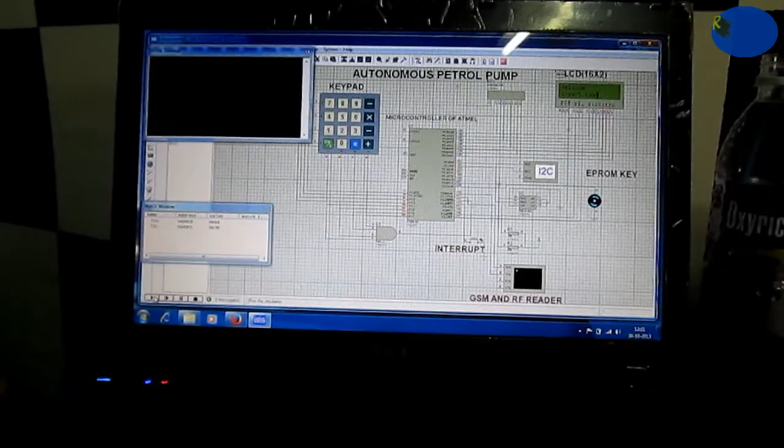So now let's see the actual simulation of our project. We can see on the LCD it will display 'Welcome' and then 'Insert Key'. Insert key means it requires the RF card, because we are giving the RF card, that is an EPROM key, to the authorized person, which contains the available balance along with his mobile number.

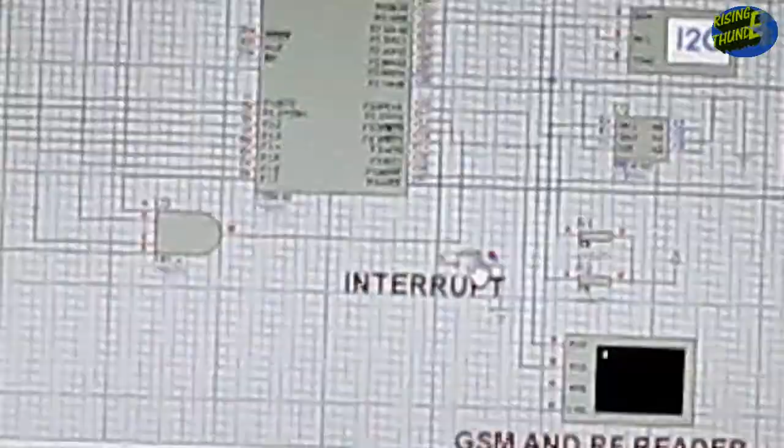Which is registered at the filling station. So I will provide the interrupt here to insert the key. Okay, so now as I press the interrupt, the key is inserted. The display is showing a wait statement because it is scanning the content of the RF card.

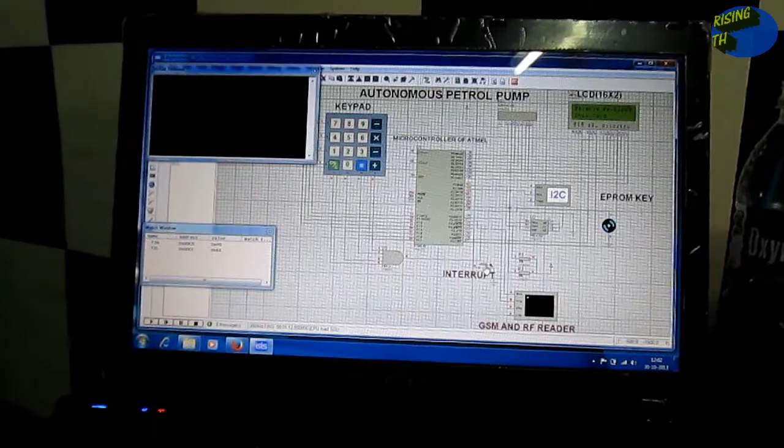That is, first the available balance in the card, and next the mobile number registered by the user. We have used this EPROM key because we are going to send a message through the GSM module to the particular customer. Now we can see on the LCD it shows balance equal to 3,000 rupees and 'show card'. This command is for showing the RF card.

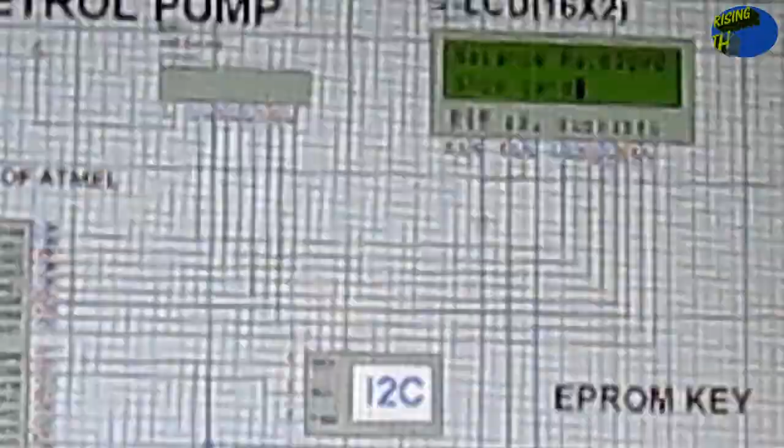The RF card, when we show it, provides a high degree of security, because it will read this 12-digit number from the RF card and provide it to the system to give access. So now we will insert the RF card number on the virtual terminal, that is, we have created the 12-digit RF number.

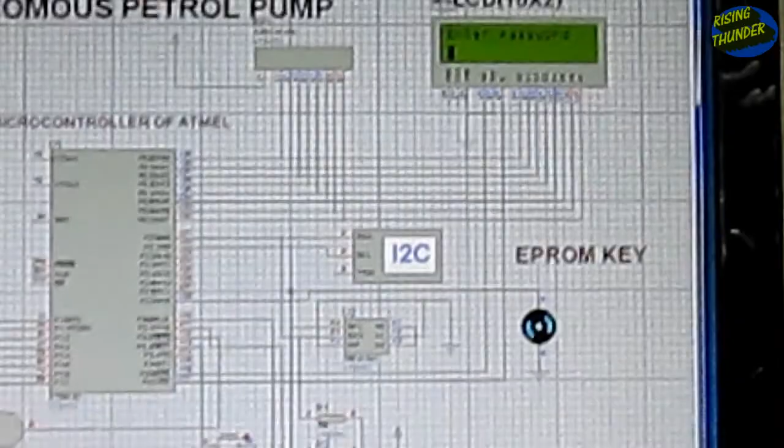Now as we insert the RF number, the display will show the valid card, and it will send the message to the particular customer's registered mobile number. The controller is now asking for the password.

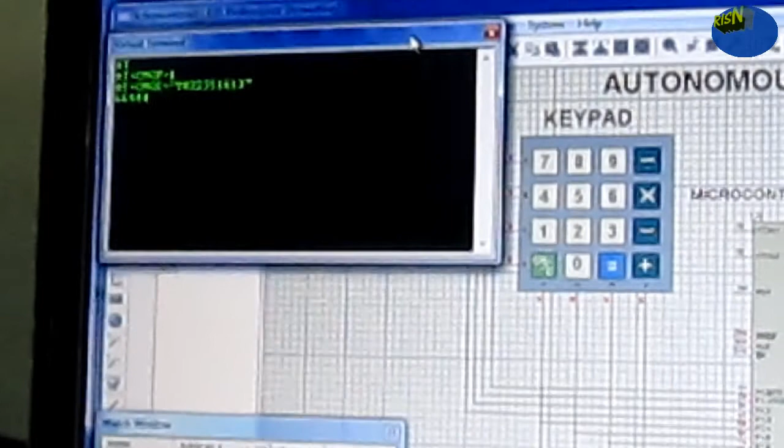The password is given on the virtual terminal. Now we can see the password, that is 66444. So now we are going to insert the password by keypad.

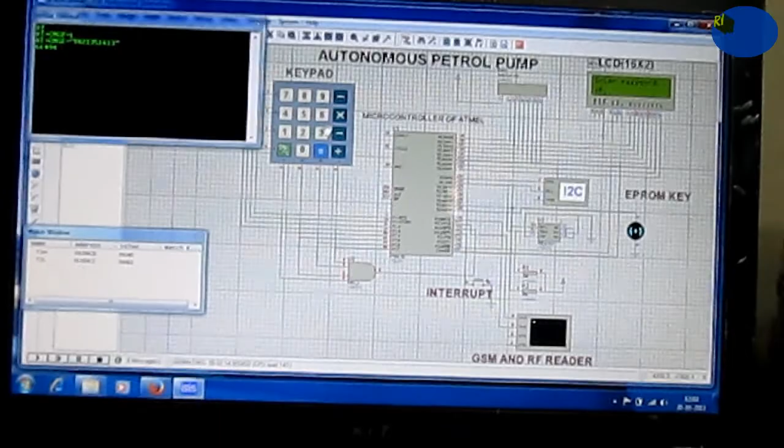6 6 4 4 4, and then enter. It will show the valid card, and now it is asking for the enter amount, that is the amount for which we require the fuel.

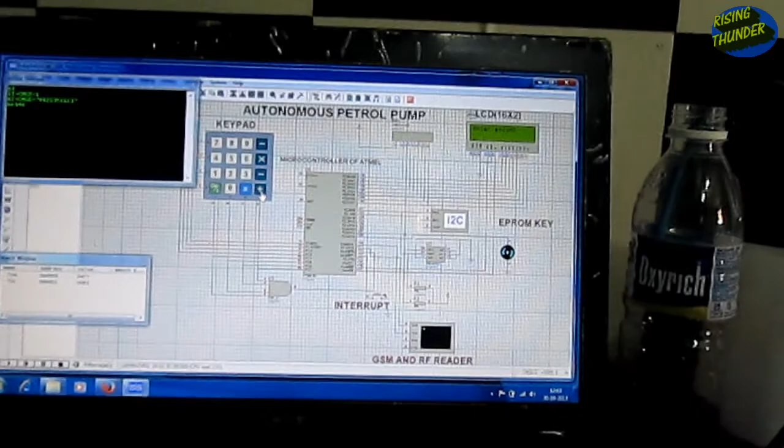So now we are going to give the amount for which we require petrol, that is 0100. Now I have written the 100 rupees petrol. So when I write the 100 and press enter...

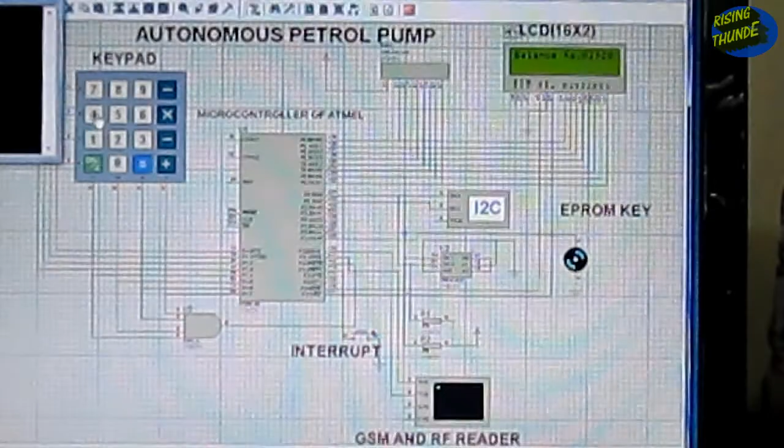...that time we can see the motor start rotating, that is the pumping motor starting to give the fuel, and we can see on the LCD that the balance is 2900, because initially we had selected 3000, which is deducted by the 100, making it now 2900. The motor will give the fuel to the customer, and again it will say thanks and visit again.

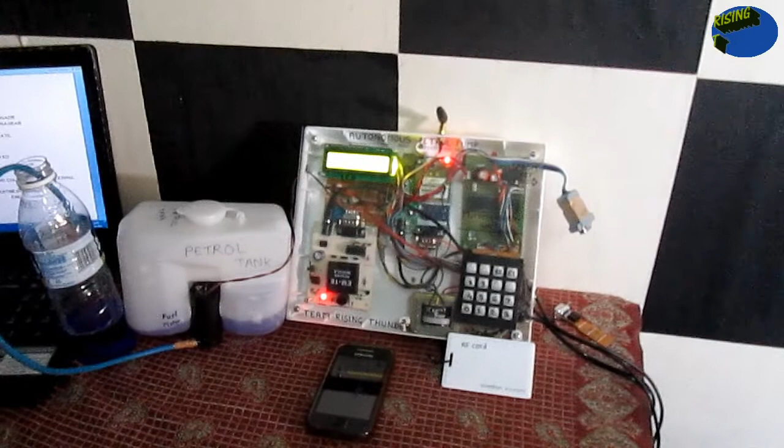So here you can see the whole project in front of you. The project is made up of different devices and different components. Let's see those components one by one, and afterwards we will see the whole demo of our project. Let's start with the main part, or the heart of the project, called the microcontroller.

This is the microcontroller made by Atmel. The name of the microcontroller is 89S52. The reason behind selecting this is it is very user friendly, easy to use, and the function required for this particular project is satisfied with the help of that controller.

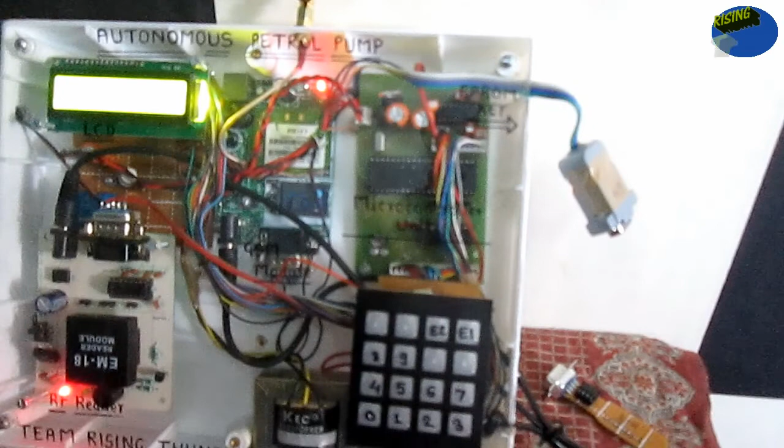Now let's move towards the LCD screen. The LCD screen has been interfaced to the microcontroller at its port 0. The LCD we have used is 16x2, that is 16 characters and 2 lines.

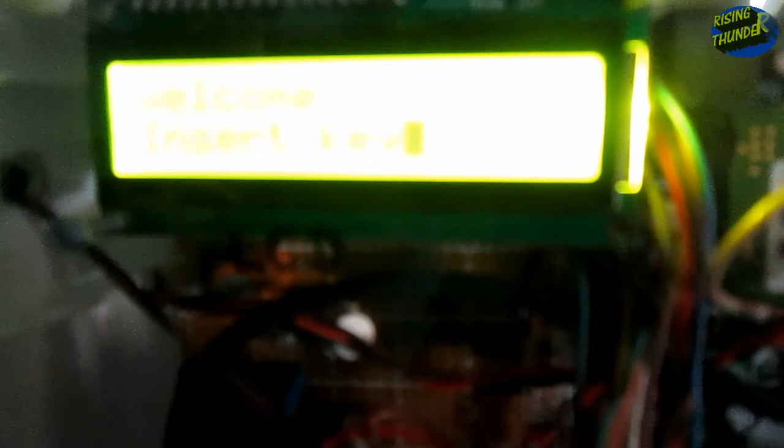After knowing the LCD, let's move towards the keypad. The keypad we have used is 4x4, that is a 16 keypad. That keypad is interfaced to port 1.

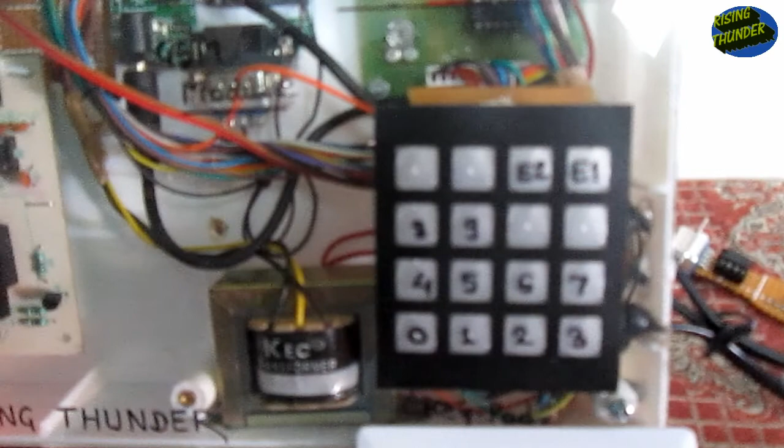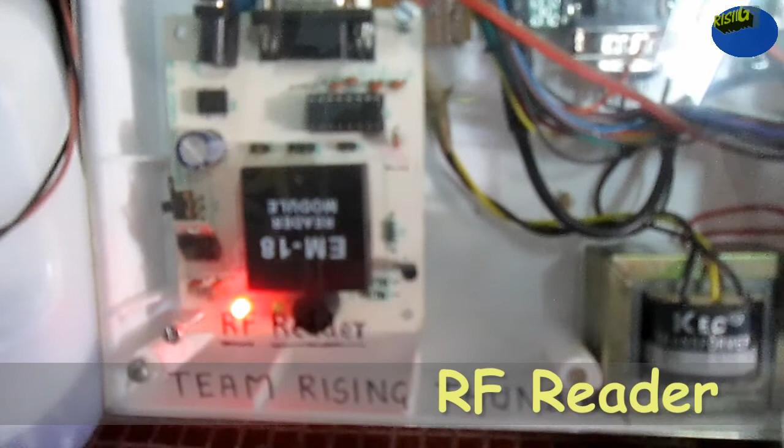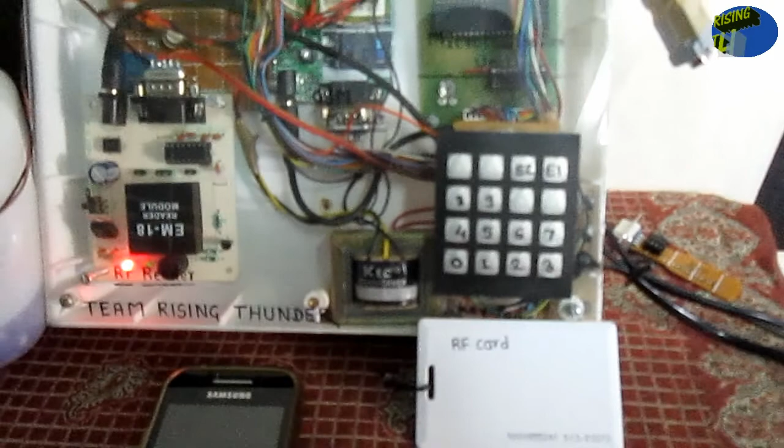Afterwards we will move towards the RF reader. What is the significance of the RF reader in our project? As you know, we require showing the RF card. The RF card we show would be read by the RF reader, and when the RF reader reads the value, that value is sent to the controller via serial port. After sending that value, the controller will check whether the data sensed by the RF reader is the same as what is stored in the EEPROM.

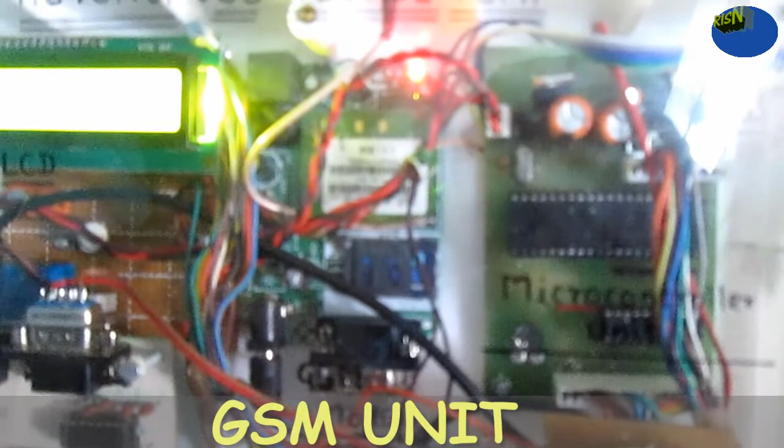Now let's move towards the GSM module. The GSM module is used to send the password to the customer's mobile. So whenever you insert the key and show the RF card, you require to insert the password, and that password would be sent by GSM to the mobile. You can see over here the antenna of the GSM, used to send the password to the mobile. You can see the mobile over here as well.

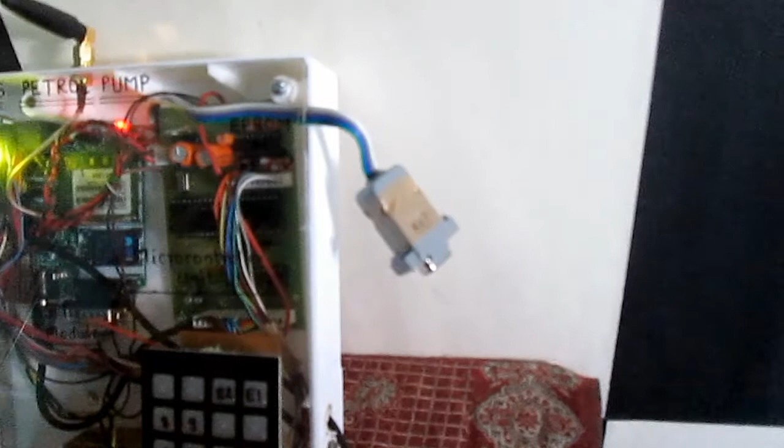Okay, so this is the RF card. After that, here is where you have to insert the key. This is the key, and you have to insert this key over here. So this is an EEPROM IC which is connected over here, and this EEPROM IC should be connected to the key.

The fundamental setup is that the EEPROM IC is connected to P2.0 and 2.1, and we provide an interrupt with the help of the key. When it provides an interrupt, it checks whether the key is valid, and if valid, it proceeds further. So this is the whole circuitry.

Now, from where we pump up the petrol - you can see here the petrol tank. We have connected the petrol pumping motor. In this petrol tank, you can see the blue color, which is the petrol. That petrol is pumped through the pumping motor with the help of the pipe, and the fuel is inserted into the bottle.

So this is the whole circuitry that we have designed, and it's enclosed into a single case. Let's brief on what all we have seen: first the microcontroller, after that LCD, then keypad, then RF module reader, after that GSM, EEPROM key interfacing, and petrol tank. So this was the complete hardware description of our project. Thanks.

So now you have seen the hardware description of our project. I think you are eager to see the simulation of our project. Now let's move towards the simulation of our project.

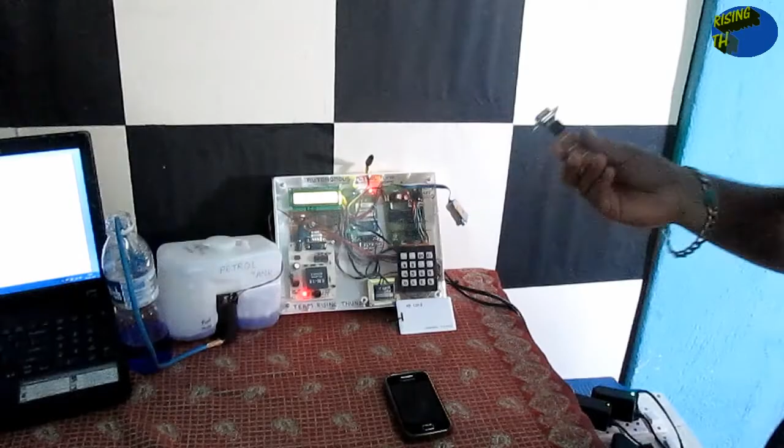So I have the EEPROM key in my hand, and I am the customer. As a customer, I would have to first insert the EEPROM key into the EEPROM key socket. So I am inserting the EEPROM key over here. I have inserted the EEPROM key. As soon as I have inserted it, the display will show the indication 'wait'.

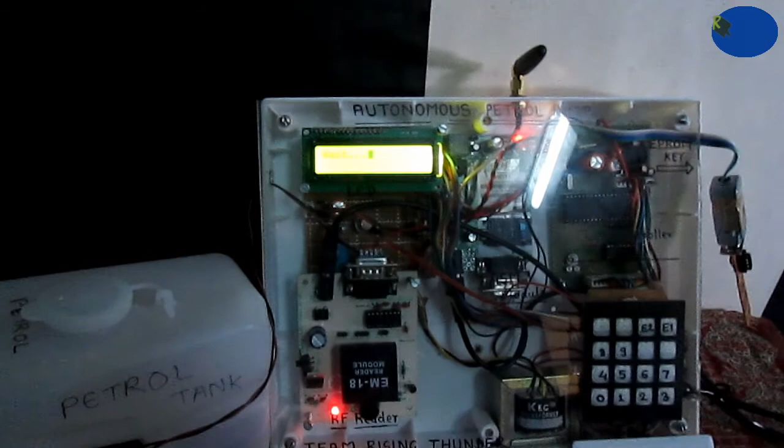So what does it do when the indication is wait? The EEPROM is read by the microcontroller, which reads the valid EEPROM key number as well as the phone number written into the EEPROM, and the balance amount. So it will show the total balance in the EEPROM, which is 2000 rupees, and afterward it will show 'show card'.

So this is my RF card, and I need to now show this RF card to the RF module. Now I will show this RF card. As soon as I have shown this RF card, the display shows that the RF card entered was valid.

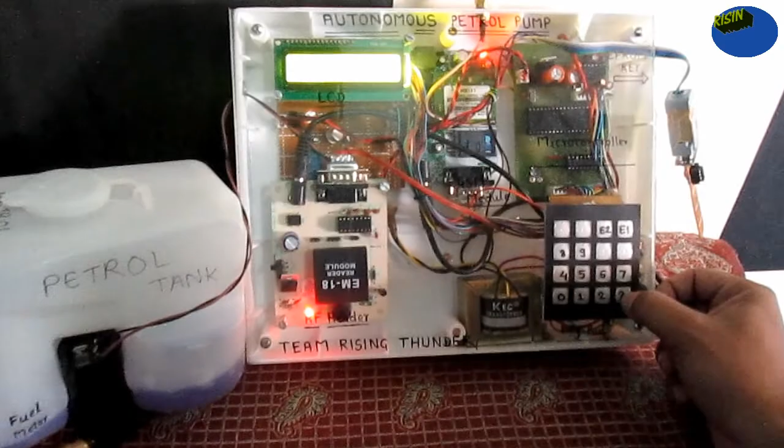Afterward it will show 'enter password', and that password is sent to my mobile through an SMS. So this is the password, that is 38582. I need to now enter this password through the keypad. So now let's enter the password through the keypad: 38582. After entering the password, press.

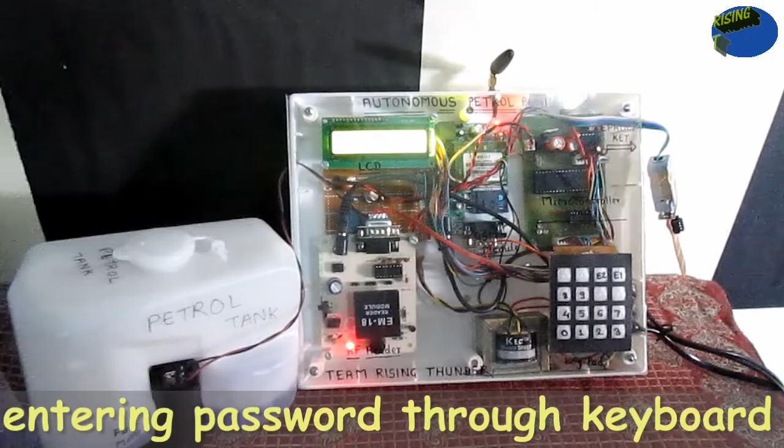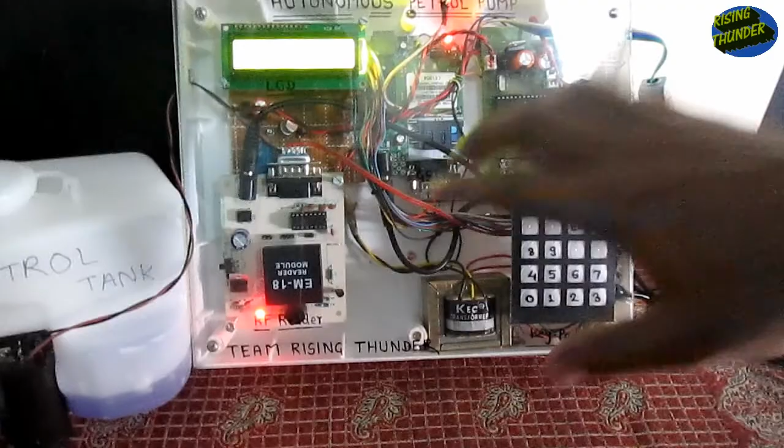After entering the password, the display shows 'enter amount'. Now the customer has to enter the required amount through the keypad, so that it will pump that particular fuel. Now I'll enter the amount - I want to enter 100. So 0100, and after that I will press E2.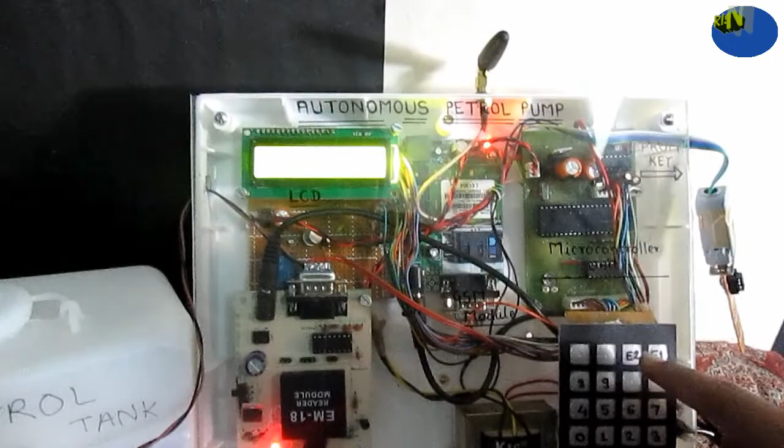After pressing E2, the remaining balance would be displayed, that is 1900 balance, and the pumping action takes place. Now you can see the pump is on, and the fuel is being inserted into the petrol tank. The system is designed in such a way that for a particular amount, a particular delay is generated for the motor, and only that particular amount of fuel is pumped out.

After completion of the whole process, it will show 'done', and again the system will resume from 'welcome, insert key'. So here we have seen the overall demo or overall working of our project.

That's what we are going to do actually - inserting the key, showing the tag, entering the password, afterward entering the amount, and then taking out the petrol. So for designing this whole project...